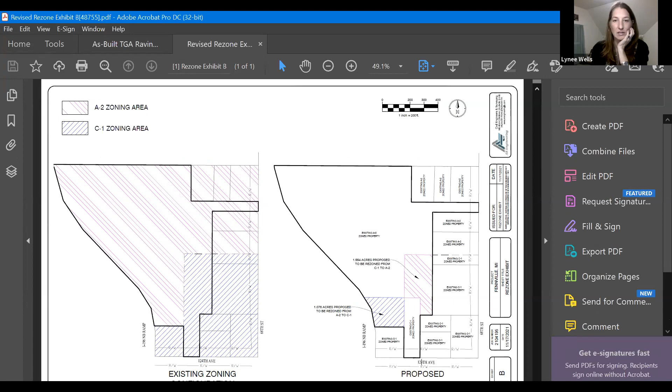And I mean, eventually, again, if this is the same owner, this square and this 19-acre, it would all be joined. I haven't done the calculation. I don't know what the frontage is from this corner to this corner, but it might be 250. It might be enough. But again, that's not part of this analysis per se, this frontage issue. But I did want to address it because it has come up in correspondence.

Let's see. There was a mistake in the original zoning classification. There was not a mistake that we're aware of. And J, adequate sites are neither properly zoned nor available elsewhere to accommodate the proposed uses. Well, you know, there are adequate sites. We have a lot of areas already zoned for C1, C2, and C3. So we couldn't say that there isn't enough commercial in the township.

So, no, I know that some of these can go either way. So I know that's kind of difficult, that there's some subjectivity here, and I wish it was really cut and dry, but these are those types of requests that, you know, that's why we have a planning commission of 7 people to kind of reason through these. And that's why we have public hearings to hear perspectives of those that might be impacted, as well as the applicant. So I'm happy to answer any questions before you hear from others.

At this time, should we hear from the project representative if we have one present? Yeah, I do not see the exact name of the person who made the submittal. You can for sure raise your hand. Oh, Andrew Rosell. Hey, Andrew. Oh, there's Andrew. Okay, I've never met Andrew, but Jean, are you also with the public or with the applicant? No, I'm with the public. Okay. I'm going to mute you and I'm going to turn off the videos for those who are not on the planning commission and those who are not the applicant. Okay. There you go. Becky, I'll turn it over to you. Andrew, can you hear me? Yes.

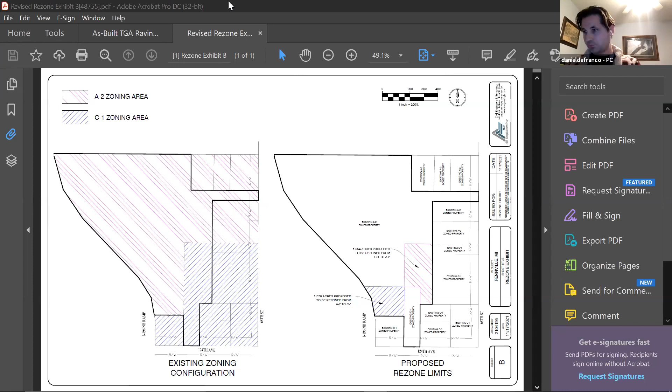deliberation to just have a little bit to go on. Boy, so much has been said, I wouldn't know what to add. Well, maybe just a few of the points that, I don't want to put words in your mouths, but that I heard: that it's a net decrease in commercial. That it's consistent with our master plan when that commercial is relocated, because the master plan shows residential in that area. That it fits the zoning description for C1. And Lynee, your statement that commercial establishments at the freeway and M89 interchanges should be recognized. So that's part of our master plan.

So Michael, you made that motion, is that right? Yes. So Michael, is it okay to add those items, that there's a decrease in commercial by making this change, that it is consistent with our master plan and a conforming use to the master plan, and it fits zoning for C1? And I don't know what the last one was. Along M89. Well, our master plan states that commercial establishments at the freeway and M89 interchanges should be recognized. I don't know what that means either. Well, basically they're saying that this is an area that should be developed, and that it's appropriate for us to develop it and look at that in regards to M89.

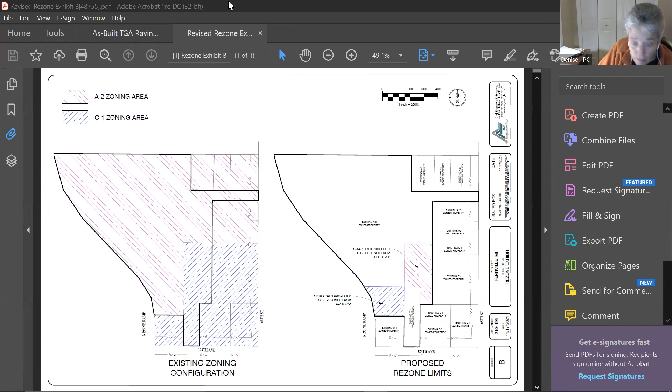Any comments? Okay, Eiley, yes. DeFranco, yes. Round, yes. Helmrich, yes. Webster, yes. Worth, yes. Israel's yes. Okay, motion passed unanimously. Thank you for your time tonight. Thank you, Mr. Waltz, for being on this call.

Is there anyone that needs a couple-minute break here before we move on to the next item? That would be great. Okay, then you're excused for 3 minutes. How's that? 3 minutes. All right.

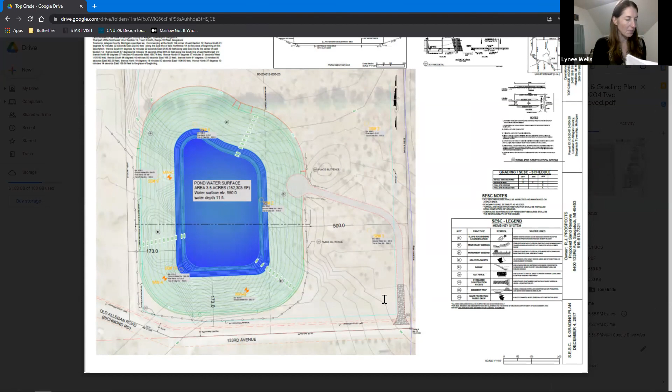You also have the review from the township engineer, my review, and the soil environmental report from Lakeshore Environmental. This report from Lakeshore Environmental was reviewed by Prein and Newhof, and they had no issues with it, just to let you know. Okay, so the original approval, I'm also not a geohydrologist. It's a sand mining operation. This is the area of excavation, the brown line that encircles the pond. There were gentle slopes going down until you got to the blue area, which is the pond water surface.

That's when the slopes become more steep as you get down to the bottom of the pond. So the water depth from where the water started to the bottom of the pond, and again, I'm not the hydrogeologist, was 11 feet. And then this whole area of the pond was 3.5 acres. Their original proposal, they were filling that pond by tapping into the water table. So that water table would bubble up and fill and provide the water, as well as rainwater and runoff, but mostly getting down to that water table.

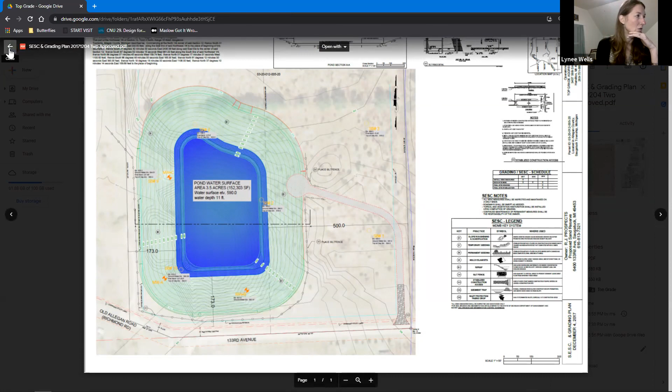So the surface water elevation is 590 feet, and then another 11 feet under that would be how deep that water table is. So that's what was originally approved. This is what is built today. And is that right, Ross? Is that the right one? Yeah, do you have one that overlays it on the one you just showed? Yeah, that's what I was looking for.

Lynee, could I ask a question? Quick one? Yeah. So what was the intention of making this pond? It was a sand mining operation, so, mineral extraction. And then the pond would be something that was left for probably future residential development around it, like a waterfront property, for example.

Okay. So the person who owned the property where the excavation was done, did they own the property surrounding that area? I think they own the entire property. So the surrounding, all those property lines that you saw. So there might have been an interest in developing some homes or something around there, right? Yeah, or doing the extraction and then selling it to a developer. Okay, good. Thank you.

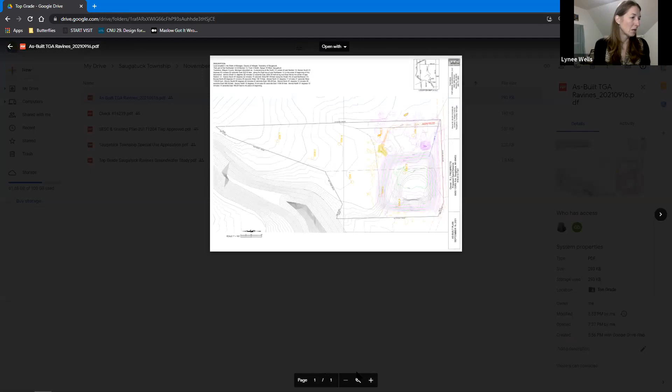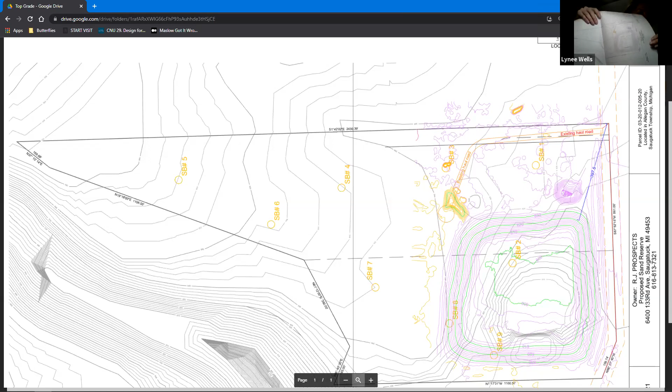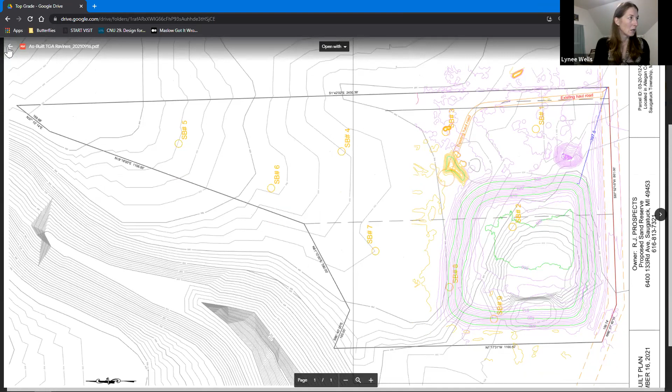Let me just see. I don't think that I have the overlay one. I'm sorry, I don't have it. So anyway, now what is built, it's not in your packet, but it's this pink one. I think we have it. So you can see that the elevations are different. There's no consistent water at the bottom. There's no real pond. And the elevation down here is about 600. I know Dana's report was pretty detailed about all this. So I'll just get into this.

So we became aware of this because we received a call, somebody was interested in buying it and they wanted to make sure that everything was built according to the plan. So it gave us the opportunity to compare the plans that were submitted and approved with the existing conditions. When we went to the site, we discovered that the pond depth was not per the approved plans, that the water source to fill the ponds was not per the plans, and even Ross shared this over the phone with us. The circumference and shape of the pond is not the same as the plans.

The 4 inches of topsoil that was in their narrative in 2018 and the seeding is not per the plans. We went out there, we looked at the soil. It was not a quality topsoil to hold anything other than weeds. And the banks of the ponds have not been stabilized.

In addition, Top Grade did receive a warning or a violation from EGLE because they were trying to utilize the existing drain nearby, the Ash Drain, to divert the water from the drain to fill this pond. And so they applied to EGLE for a pond permit, and I believe that was denied. And so they had to reestablish the Ash Drain and bring it back to the way that it was.

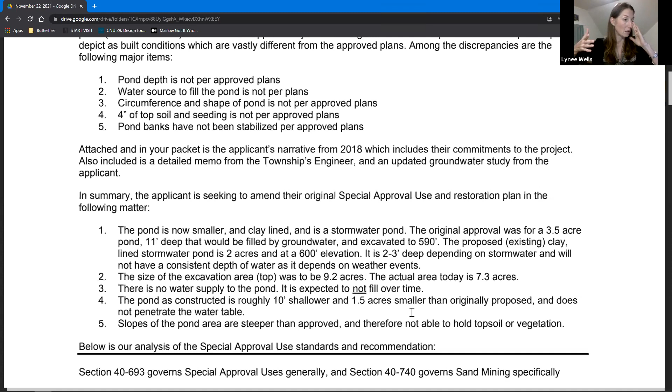The slopes, this is a big thing that we found. The slopes on the sides are much steeper. They're steeper than were approved. They're so steep that they do not hold topsoil. If you go there, we went there, it's rutted out. You can see how it's eroding. So those are some of the key issues.

So essentially Top Grade has made a submittal to amend their special use. Their mining isn't active. We still have a special use. It needs to be amended because it doesn't match what was approved. And our job is to go through the special use standards and think through how can we meet the standards given the situation that we're in? What can we require moving forward? Yeah, so that's where we're at. So I can turn it over to Ross to fill in the blanks.

Yeah, no, some of those things weren't true, Lynee. I want to clarify a few of them first. The DEQ didn't deny us. We dropped it for a pond expansion permit. But they did give you a violation. Correct. They gave us a violation, but then we began the process. I hired Kurt Koella, who is on this meeting, to start going down the process of getting a lake expansion. We actually wanted to do a bigger lake than what we were permitted.

That's one of the reasons that we wanted to work through EGLE, because by clay lining it, the water level, instead of being way down there at 590, we could bring it up closer to the surface where it would look more aesthetically pleasing, similar to the neighborhood. Because we ran into so much clay, we thought that was a possibility. And the other thing was we ran into the deadline of the mining. So that was a big part of us shrinking it as well. January came and I think we got maybe a couple of weeks or a month extension. I had Griff out there and mentioned to him at the time that we were thinking about clay lining it. So he was aware of it at the time.

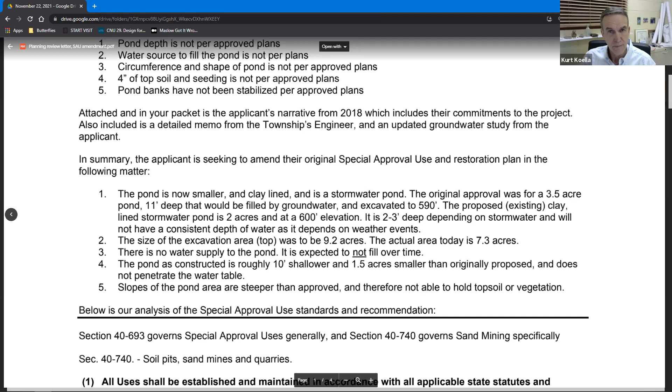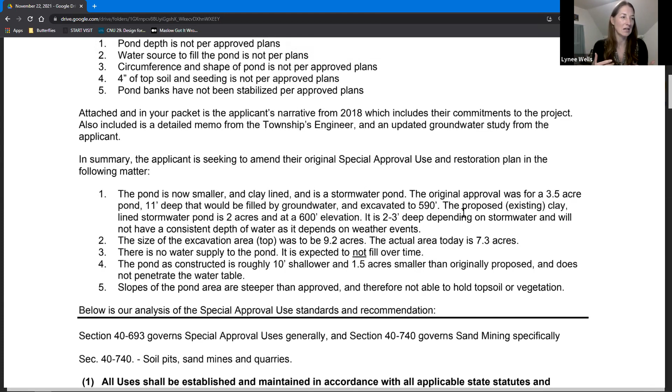I know as planning commissioners you reviewed the memo from the township engineer. We were provided a survey from the applicant, and we calculated the slopes based on the survey they gave us. So I don't know why there's a dispute—they gave us the data, and the data doesn't match what was approved. I just wanted to go through our special land use standards, because we do have some thoughts around this, about what we're given here from Top Grade.

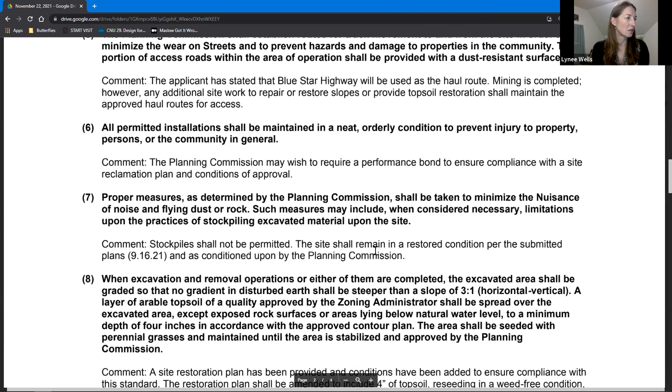So we have some special approval standards specific to mining operations, and then we have specific standards for special uses in general. So we're going through those, comparing what was originally approved with what we have today, and really trying to reach some type of common ground here.

All uses shall be established and maintained in accordance with all applicable state statutes and regulations. If any requirements of this subsection are less strict than applicable state statutes, the state requirement shall prevail. We added conditions, if we were to accept this, that all required state and local permits be secured, as well as any permits required to regrade, reseed, or restore the site.

Essentially, our recommendation is that we approve this amendment with several conditions that ensure this becomes—I wouldn't say an amenity, but not the kind of dangerous eyesore situation that we have today.

Number two: no fixed machinery shall be erected or maintained within 50 feet of the property, and no cut or excavation shall be made closer than 50 feet to any street or private road. That standard is met—the mining limits are more than 50 feet, and the amended plan and amendments are also more than 50 feet.

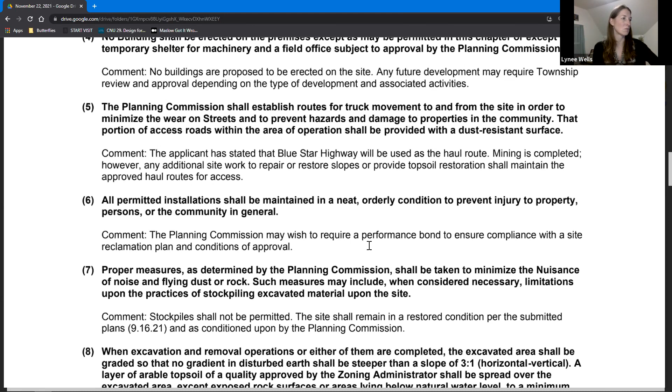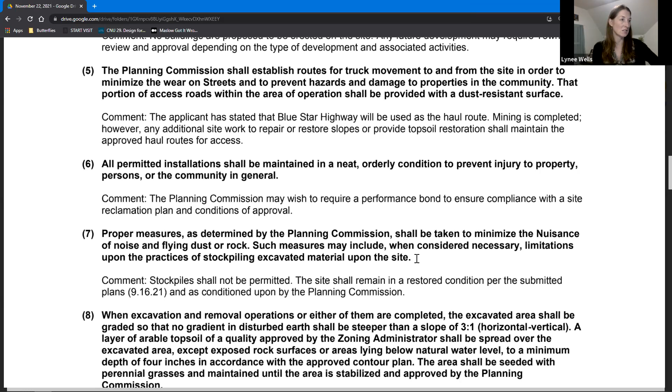To move forward, we would like to see a new performance bond, probably around $50,000, to ensure compliance with the site reclamation plan and your conditions of approval. Number 7, proper measures shall be taken to minimize the nuisance, flying dust or rock.

So we're reiterating that we're not permitting any stockpiles, and that the site shall remain in a restored condition, which includes any conditions you might add as a planning commission.

When excavation and removal operations, or either of them, are completed, the excavated area shall be graded so that no gradient in disturbed earth shall be steeper than a slope of 3 to 1. A layer of arable topsoil of a quality approved by the zoning administrator shall be spread over the excavated area. The area shall be seeded with perennial grasses and maintained until the area is stabilized and approved by the planning commission. So they do have a site restoration plan.

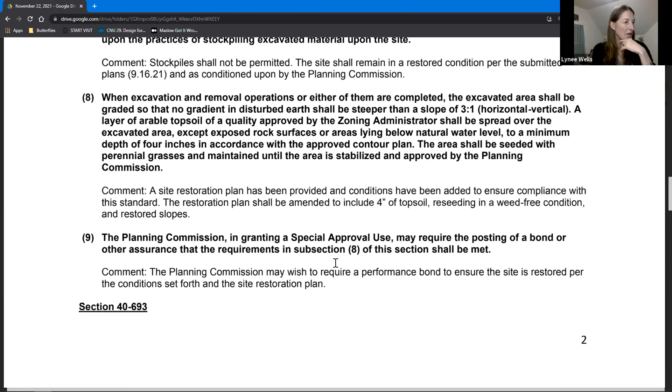We've included conditions in this memo. The restoration plan shall be amended to include 4 inches of topsoil, because they're not showing that on their restoration plan, and that it be reseeded in a weed-free condition, and that the slopes be restored. And then number 9 is, again, the performance bond.

Then we have general special land use standards. These apply to all special uses in the township. So we have to evaluate the request according to these 4 standards. Will the use be designed, constructed, operated, or maintained in a manner harmonious with the character of the surrounding area?

Pending compliance with these conditions. So I think first we need to know that they're going to comply with our conditions. The proposed amended use would be less impactful to the water table because they're not drilling down, and it's resulted in less excavation. So what they're proposing today is, I guess, less out of character with the surrounding area.

Number 2, will the special use change the character of the area? Well, it's already been mined, right? But it hasn't been restored according to the plans. So only if it were to be restored in a manner where there's vegetation, where the slopes are not as steep, would this be in keeping with the character of the area.

Number 3, will the use be hazardous or detrimental to public safety or welfare by reason of traffic, noise, vibration, smoke, fumes, or glare? Well, right now, it is hazardous. Those slopes are steep.

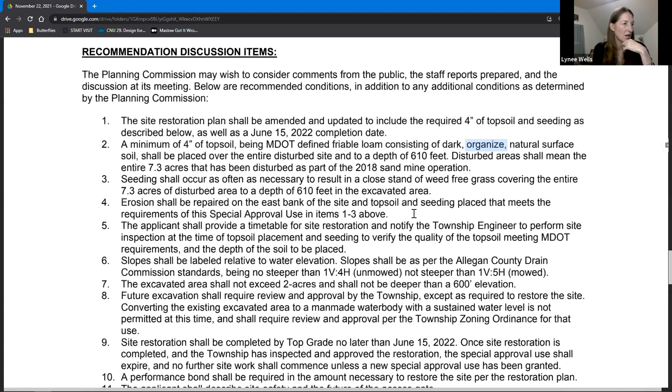Erosion shall be repaired on the east bank of the site and topsoil and seeding placed that meets the requirements of this approval. Five, the applicant shall provide a timetable for site restoration and notify the township engineer to perform site inspection at the time of topsoil placement and seeding to verify the quality of the topsoil meeting MDOT requirements, the depth of the soil to be placed.

In fact, you could even add to this number five that we get a receipt. We can get paperwork that says this topsoil, the type of topsoil, was purchased.

Six, the slopes shall be labeled relative to water elevation, that's on the site plan. Slopes shall be as per the Allegan County Drain Commission standards, being no steeper than 1 to 4 unmowed and 1 to 5 mowed. The excavated area shall not exceed 2 acres and shall not be deeper than 600 feet in elevation.

Future excavation, if they do any, except for what's required to restore, would require approval by the township. Converting this excavated area to some kind of man-made body of water with a sustained water level is not permitted at this time. Any conversion would require review by the township.

Site restoration shall be completed by Top Grade no later than June 15, 2022. Once it's completed and we've inspected it and we approve it, the special use would expire and no future site work would commence unless a new special land use was granted.

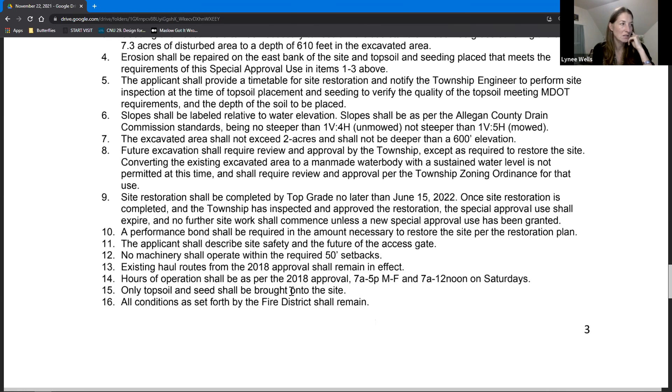And conditions of the fire district remain. Conditions of any other reviewing body remain. And that's what we have today.

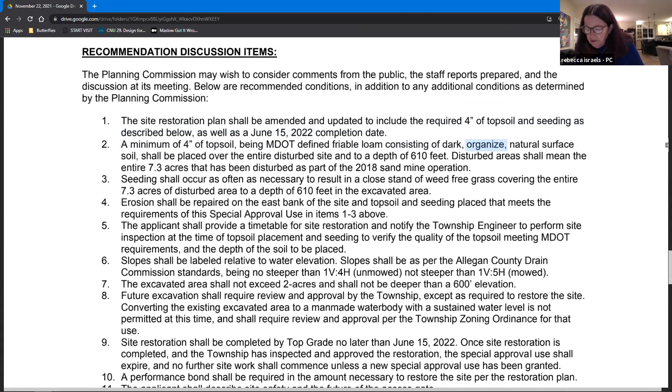Well, at this time, I would like to open the public hearing for public comment. And who would like to go first?

I'm Jane Dickey, and I would be happy to go first. Thank you, Jane. You want me to start my video? Whatever you want to do, you have 3 minutes. Okay, I'm not allowed to start my video. It won't start, so you can't see me.

Okay, Jane, will you just state where you're from? Yeah, I will. I've got it all ready, Becky. My name is Jane Dickey. I live at 6108 Old Allegan Road, across from the sand mining special use permit proposal which you are discussing.

You've received a letter detailing some of the history of the Top Grade sand mining operation. I would like to highlight what I detailed in that letter within the 3 minutes of my allotted time, with my husband Larry completing our comments within his 3 minutes.

Top Grade comes to you with a new application, which is designed to rectify the mess created when they sand mined approximately 25,000 cubic yards up to 400,000 cubic yards of sand from the site on Old Allegan Road and 133rd. I urge you to deny the request for continued digging to create what they say will be a 2-acre pond.

And I ask that you instead require that they meet the obligations they agreed to at the Township Planning Commission meeting of April 25th, 2018, to restore the area to a green space with safe slopes, topsoil and grass, and for Top Grade to pay for expert consultation with Outdoor Discovery Center on the ways to rehabilitate sand mine areas. There's several reasons why you must reject this application.

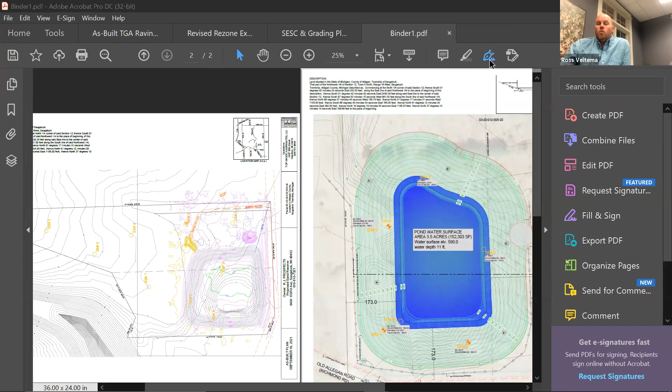Is that correct? What was originally permitted was a hole that size, if not actually a third bigger than what it is today. Then there would be water on the very bottom of that size hole, actually another 8 feet or so deep. You would have seen the water surface like the area shows. So that was the original intent. Now what I'm saying is, the water on the bottom would be much smaller, if not any.

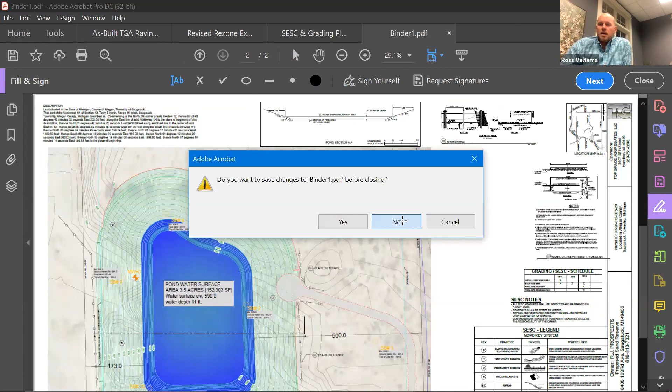The slopes, yes, I agree. We can go to original intent, which I thought was 1 on 3, but maybe it was 1 on 4. There are slopes out there that I think meet that; the west slope is probably one of the nicest slopes there. I know the one to the south is steep, but the west and some of the others are maybe 1 on 3, at least close to that. So to get it to what you're requesting, 4 inches of topsoil and 1 on 4 slopes with some nice seeding, I'm fine with that. I can do that. We can make that all happen.

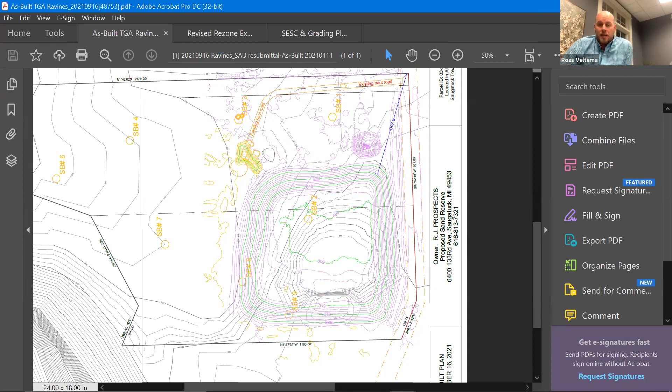I just think we're going a little overboard with the requirement to haul in topsoil and then haul in clay, when we have all that dirt on site, and it's just a matter of me investing in moving it and getting it all set up. So it's quite a job. It's probably close to a month's worth of work, but it'd be a lot less impact to the community than trying to do it all with trucks. I know that. Okay, thank you.

Is there any other clarification anyone needs at this point from Lynee? Lynee, do you know if the township collected the original performance bond from the original SAU? Yeah, we had one. I have not checked with Lori. I don't know if it's still active or not, but Top Grade was good about making sure that bond was current. I think they switched carriers at one time, so we received an updated one, so that was kept. Thank you.

At this time, I'd like to close the public hearing if there are no other members of the public who wish to address this, and leave this open for commission discussion. So if you have other questions for the applicant that weren't addressed, please ask them now or confer with each other.

Madam Chair? Yes, John. I'd like to make a couple comments up front that are relevant. I'd really like to thank both Dale Harrison and Ed Welk for speaking tonight and thank them for their many years of service to the Planning Commission. And that also dovetails into something I think we're all aware of, but I want to underscore it because I'm finding this one so challenging.

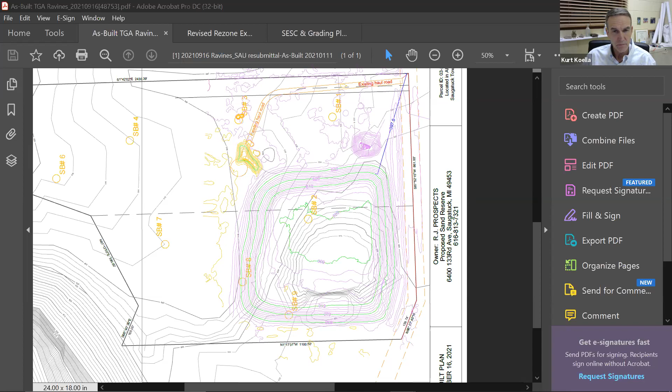I'm still in support of our special use application, because to deny is to delay. And whether we get Outdoor Discovery Center in there, whom I've worked with too, we need to get an approval so we can get moving. Yeah, I agree, Kurt. Whether we sell it to the neighbor or maybe we don't, maybe now we look at making some wetland banks or something out there. I guess those are the opportunities that arise with this.

I guess we just got to justify the moves we make. We still think the best would be to just sell it to the neighbor, but we'll see. We definitely are willing to work with the township to get it aesthetically in better shape, and we'll work through a plan to do that. We just want it to be reasonable, else we got to look for a way to justify all of it.

Rebecca from the neighborhood. Yes. This is Gene Adamczyk, 6045 133rd Ave. So, if we filled the bottom with clay so that it held some water, we'd at least have a pond rather than a 40-foot meteor crater. I don't think anybody wants to look at a hole in the ground.

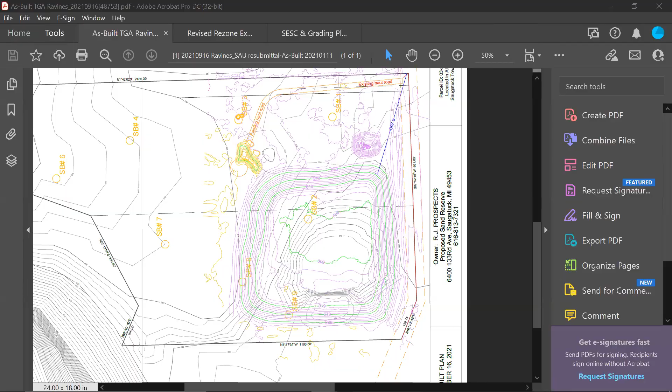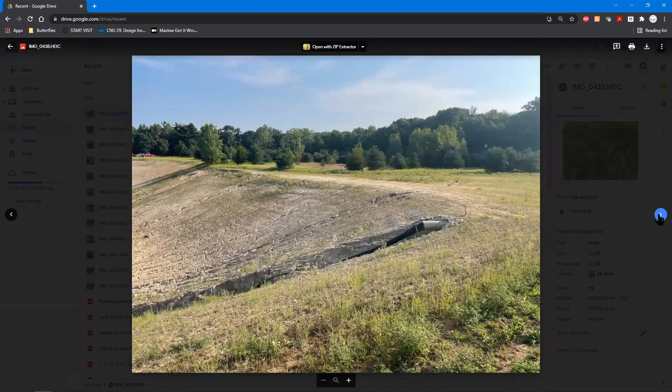If I could make a comment. My name is Steve Hickok, 6092 133rd Avenue. That drain would go into the hole for months, and it would fill up towards the bottom, but where it actually left the tile down into the bottom, it eroded the clay enough that you could see sand starting to build up. So if you see that picture, it eroded enough that it couldn't actually hold the water that was on the bottom.

So parts of it would fill up, but the bottom had never filled all the way up, despite what Ross had said. That was a couple months of watching it fill up from the ash drain, which was a lot of volume of water. As the neighbors watched it, you knew that it wasn't going to hold water for how much water was actually leaving the tile into the hole; it had some integrity issues, not enough clay in certain spots. So that's from my observations. And that's why we put that extension, like Steve said, that water going from the concrete tile down that slope eroded.

So it took out our clay liner. So that's when we put that, if you go back to that picture, you can see the black pipe. The only reason we put that on, it's hideous looking, it doesn't look good, but it stopped it from eroding. We had to get the water from that concrete pipe down to the bottom. Our intention was to fix that washout.

But as soon as we started to go down that path, this is when the ash drain thing became an issue. So that probably was one of the reasons it wasn't holding water, because it made a slice into there and got back into the sand. But eventually it would have worked. It was filling up at a pretty good pace. We had it pegged at like 300 days. We were doing some volume calculations and this and that.